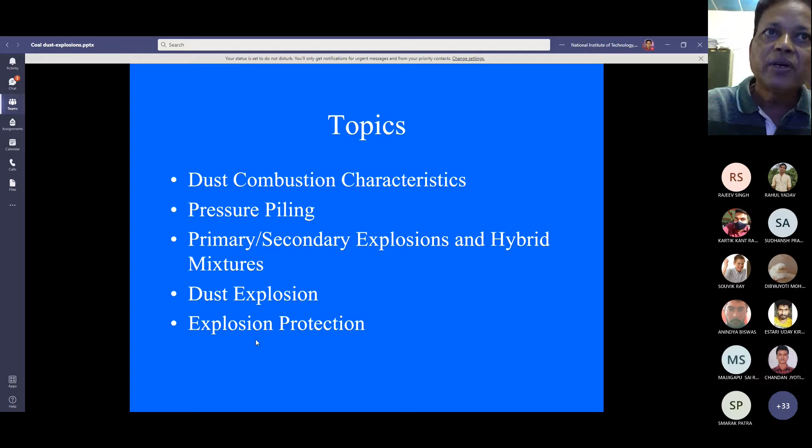Topics covered: dust combustion characteristics, coal dust combustion characteristics, pressure piling, primary and secondary explosions, hybrid mixtures, dust explosion protection plans. Also, the definition of dust, and which dust is dangerous and explosive in nature.

A finely divided powdered solid less than 420 micron size - that is the largest particles that will pass through a standard US 40 sieve. This is the definition of dust: a finely divided powdered solid less than 420 micrometer size.

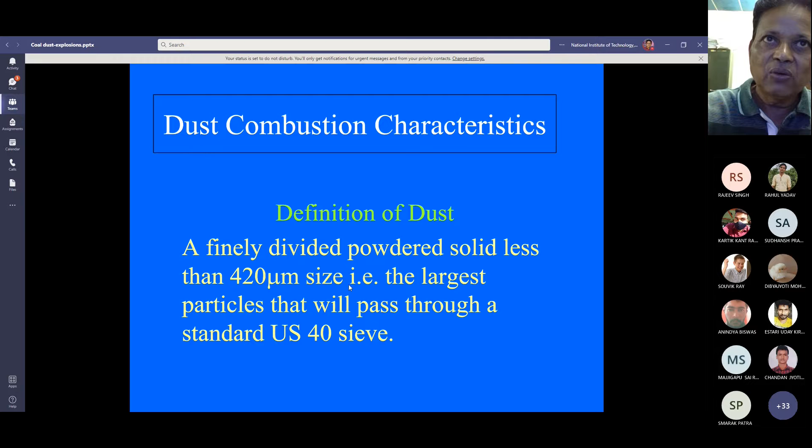Which dusts can burn explosively? Materials which, if finely divided and dispersed in the mine air atmosphere, can burn explosively include coal dust, most organic materials, many metals like iron, aluminum, zirconium, titanium, and some non-metals like sulfur, silicon, and P2S5. These are also combustible materials.

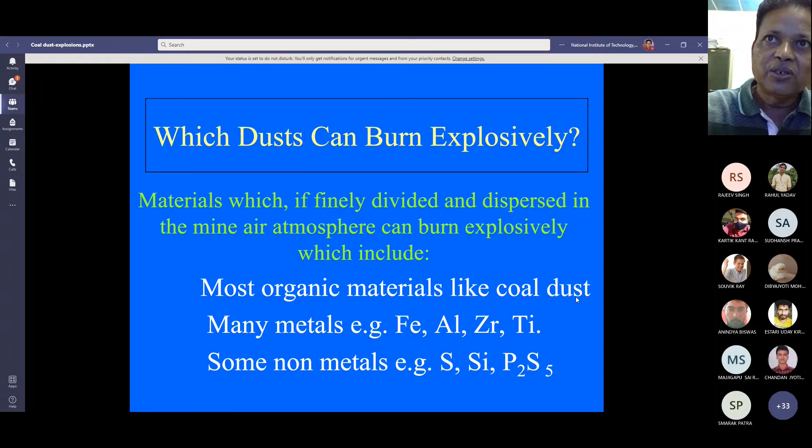So coal dust explosion can take place in your mines because coal dust is explosive in nature. The nature of coal dust explosion is generally they are deflagrations.

Deflagrations are flame fronts that propagate into the unburned cloud at subsonic speeds by a combination of heat and mass transfer. Pmax is approximately 8 times P0. Given favorable conditions...

such as long, large diameter pipework, energetic dusts may detonate. The flame front propagates into the unburned cloud by compression caused by shock waves traveling at or above sonic velocity. Pmax is approximately 20 times P0, but can be higher.

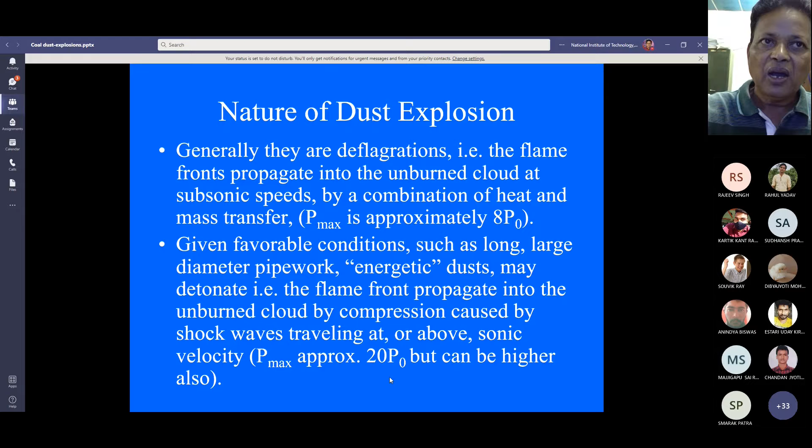What are the conditions required for a dust explosion to take place? These are the conditions necessary: a suspension of dust within its flammable range.

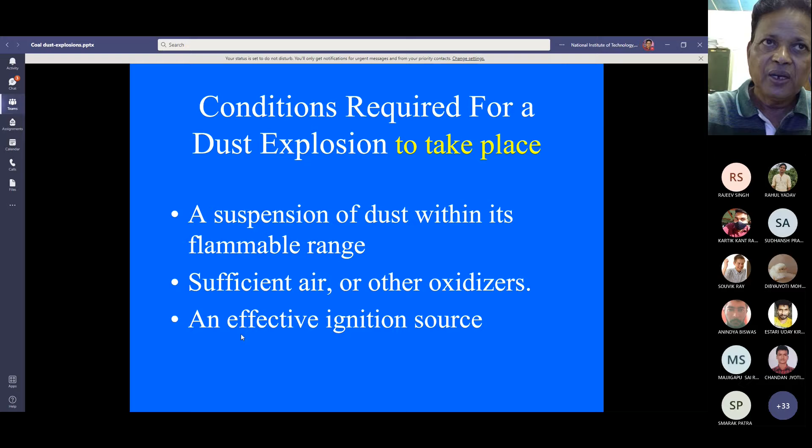Sufficient air or other oxidizers should be there, and an effective ignition source should be there. So for the dust explosion to take place, there should be a suspension of coal dust particles within its flammable range, sufficient air or other oxidizers, and an effective ignition source.

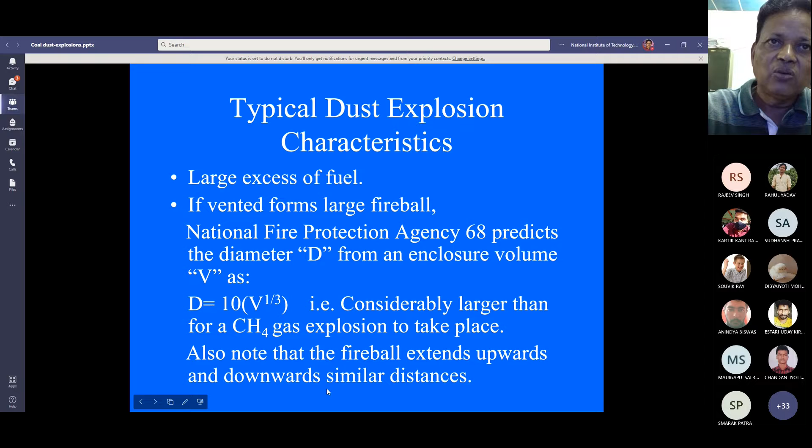large excess of fuel - if vented, forms a large fireball. National Fire Protection Agency 68 predicts the diameter D from an enclosure volume V as D equals 10 times V to the power 1 by 3, considerably larger than for a methane gas explosion. Also note that the fireball extends upwards and downwards similar distances.

This is the fireball, which extends from down to up. This is the fireball.

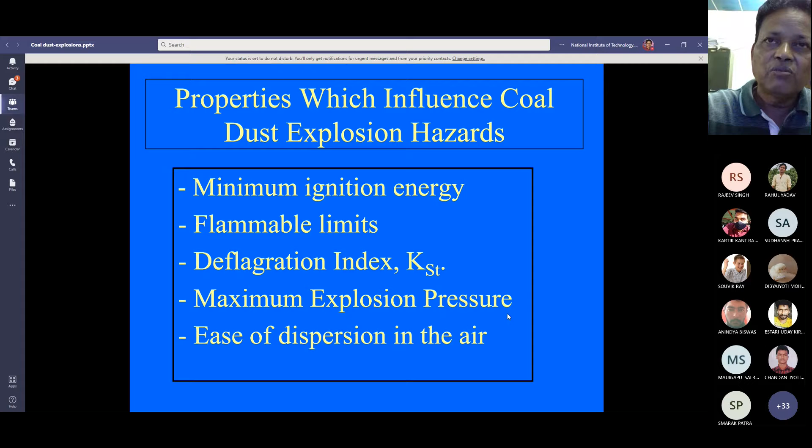Properties which influence coal dust explosion hazards: minimum ignition energy, flammable limits, deflagration index KST, maximum explosion pressure, and ease of dispersion in the air.

What is minimum ignition energy, MIE? The minimum ignition energy of a coal dust cloud depends on various factors, including particle size, chemical composition, temperature, moisture in the coal dust, turbulence, oxygen concentration, and the test method used.

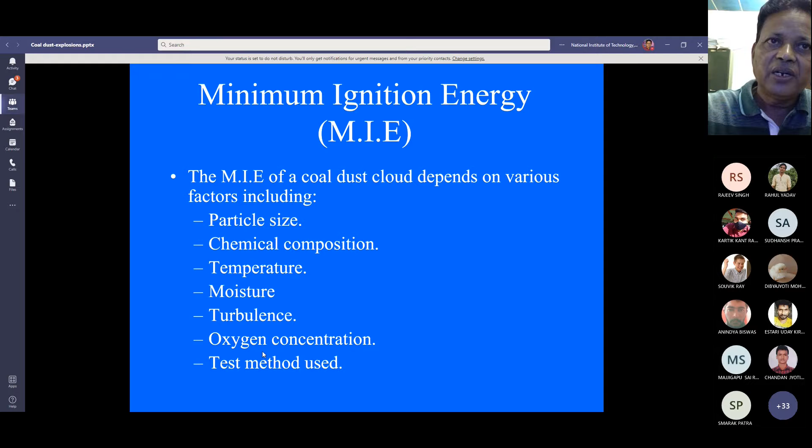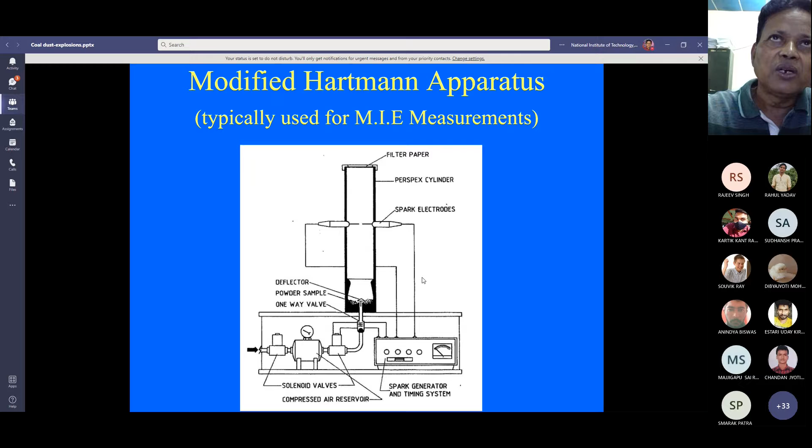The minimum ignition energy depends on particle size. In general, coal dust with particle size above 400 microns will not ignite. If particles are greater than 0.4 millimeter in diameter, dust explosions will not occur.

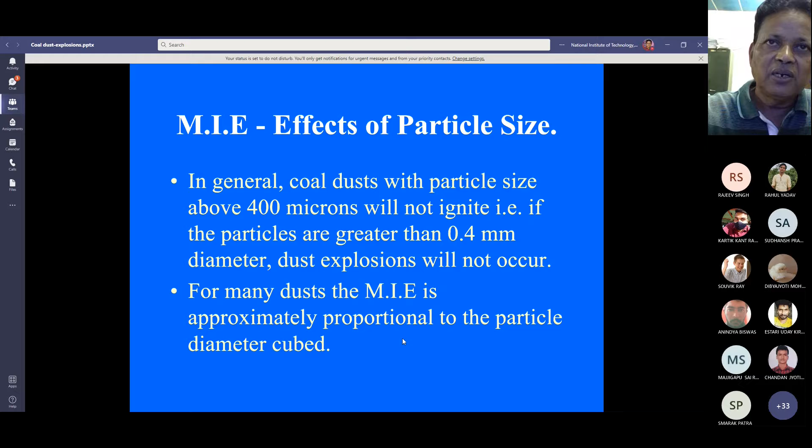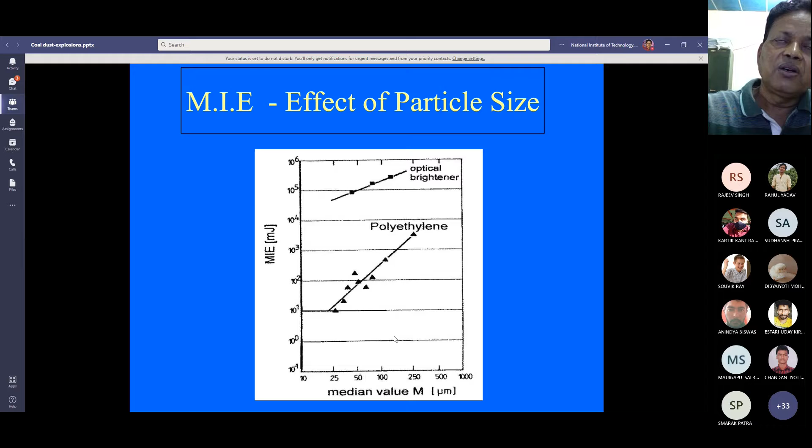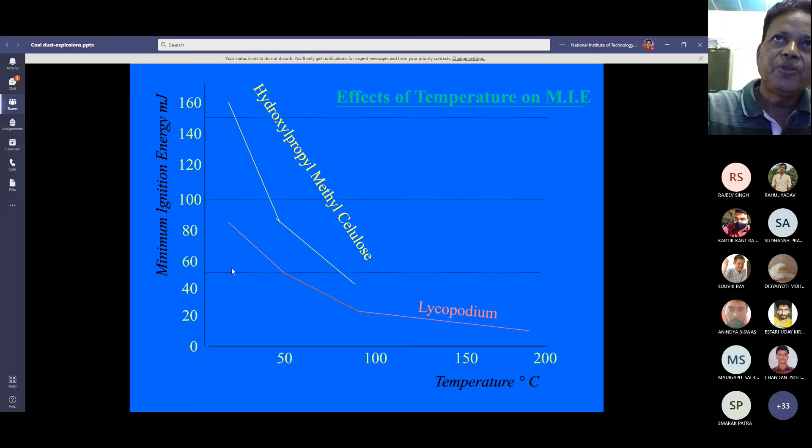Then the effect of temperature on minimum ignition energy. At ambient temperature, lycopodium's minimum ignition energy is 90 millijoules. At 50 degrees centigrade, it is 50 millijoules. At 90 degrees centigrade, it is 20 millijoules. At 180 degrees centigrade, it is 12.5 millijoules. As you can see from this table, as the temperature is increasing, the minimum ignition energy is decreasing. This is the minimum ignition energy plotted against temperature. As the temperature increases from 50, 100, 150, to 200, the minimum ignition energy decreases. This is the effect of temperature on minimum ignition energy.

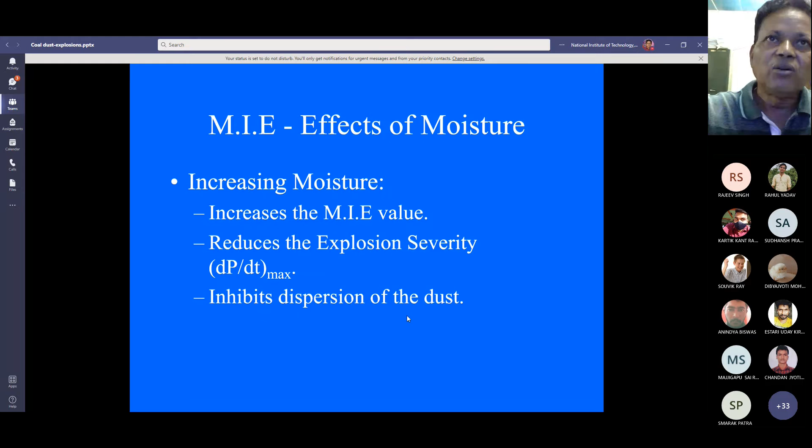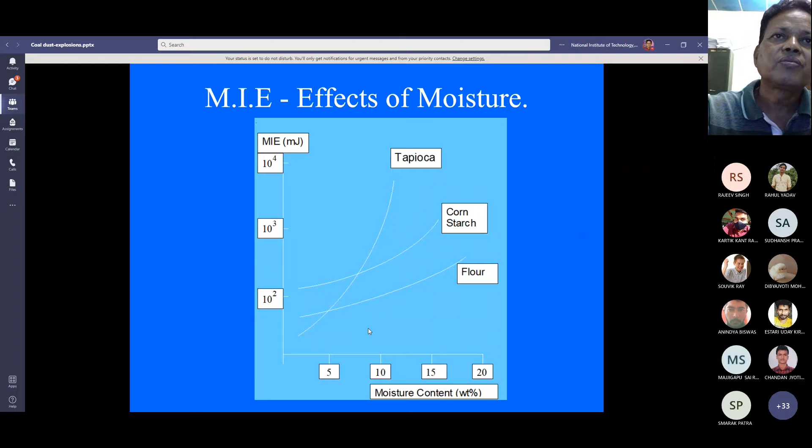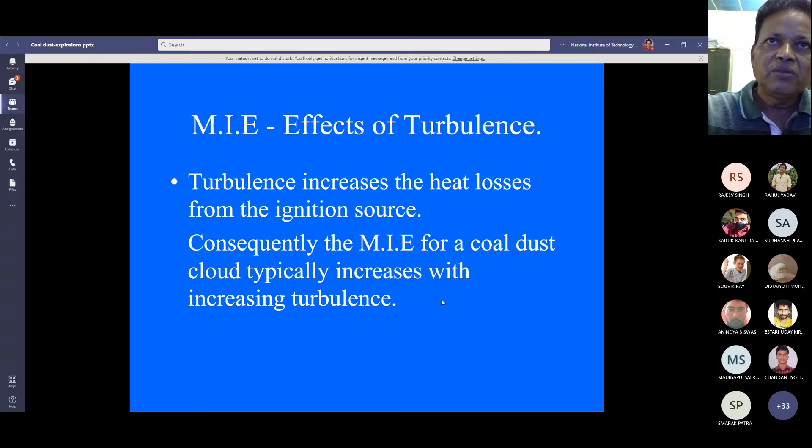Then the effect of turbulence on minimum ignition energy. Turbulence increases the heat losses from the ignition source. Consequently, the minimum ignition energy for a coal dust cloud typically increases with increasing turbulence.

Then the relationship of minimum ignition energy with oxygen concentration. Most coal dusts will not burn if the air pressure is reduced below 50 millibar. Reducing the oxygen concentration in the air increases the energy required for ignition. Most organic materials like coal dust cease to be ignitable in the range of 9 to 14% oxygen. The minimum ignition energy reduces if the oxygen concentration in the mine air is increased above 21%.

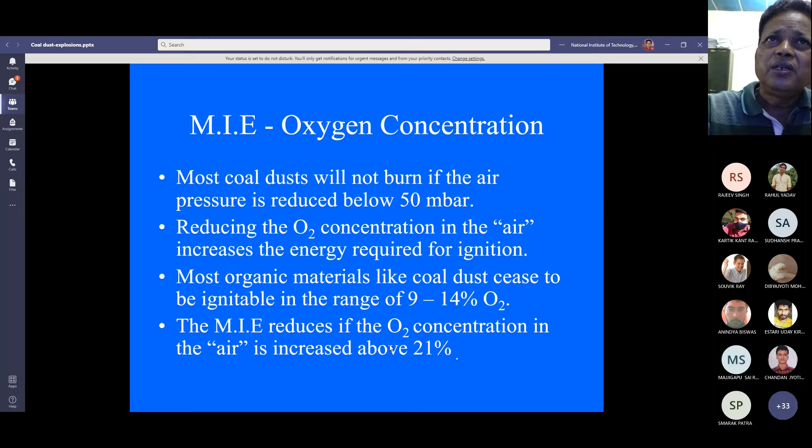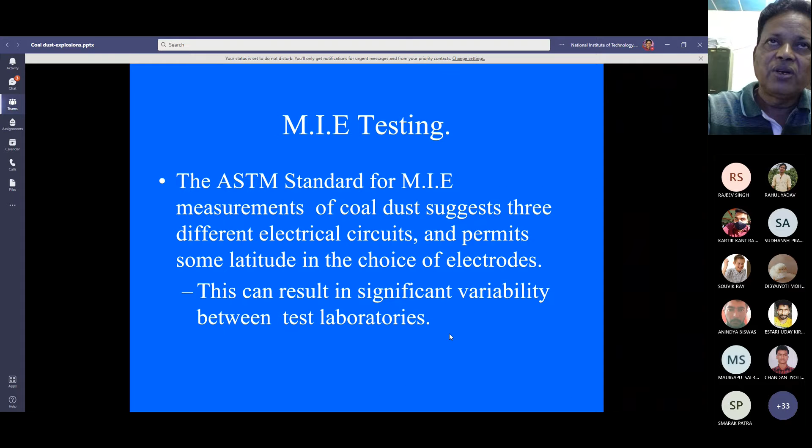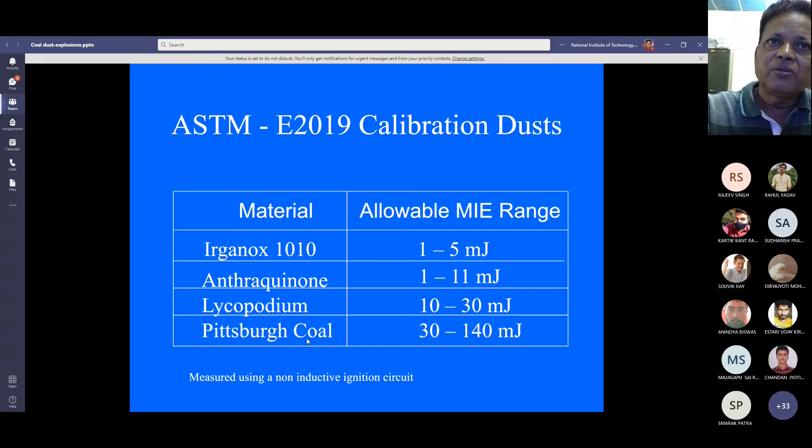The minimum ignition energy testing is done as per the ASTM standard. The ASTM standard for minimum ignition energy measurements of coal dust suggests three different electrical circuits and permits some latitude in the choice of electrodes. This can result in significant variability between test laboratories. ASTM E2019 specifies the calibration dust material and the allowable minimum ignition energy range. For Pittsburgh coal, the allowable minimum ignition energy is 30 to 140 millijoules.

Then we discuss flammable limits - lower flammable limit and upper flammable limit. You have to measure the lower and upper flammable limits of the coal dust. ASTM standard E1515-98 provides the test method for the lower flammable limits of coal dusts using a 20-liter or greater spherical test vessel. Many dusts must be at their stoichiometric concentration or higher for an explosion to occur, and optimum concentrations can be 2 to 3 times the CST.

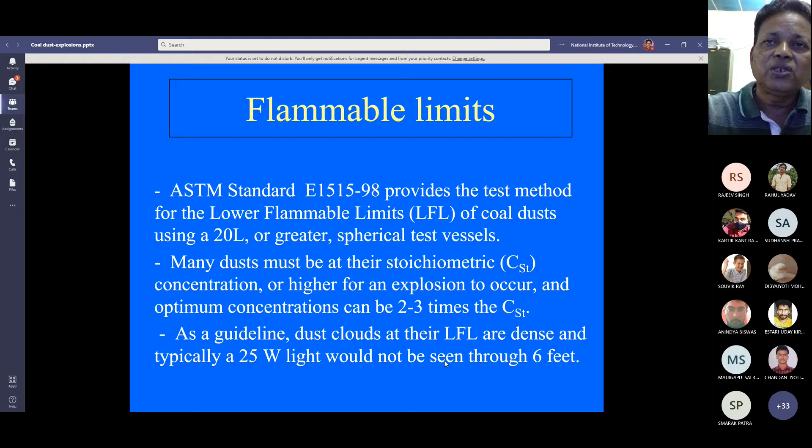As a guideline, dust clouds at their lower flammable limit are dense, and typically a 25 watt light would not be seen beyond 6 feet. Then upper flammable limits: dust clouds have upper flammable limits which are dependent on both the composition and the particle size of the dust. For example, a narrow size fraction of corn starch with a particle distribution of 106 to 125 microns is reported to have an upper flammable limit of 800 to 1000 grams per cubic meter. As a dust cloud settles, it will enter the explosive range. Also, dust layers can smolder.

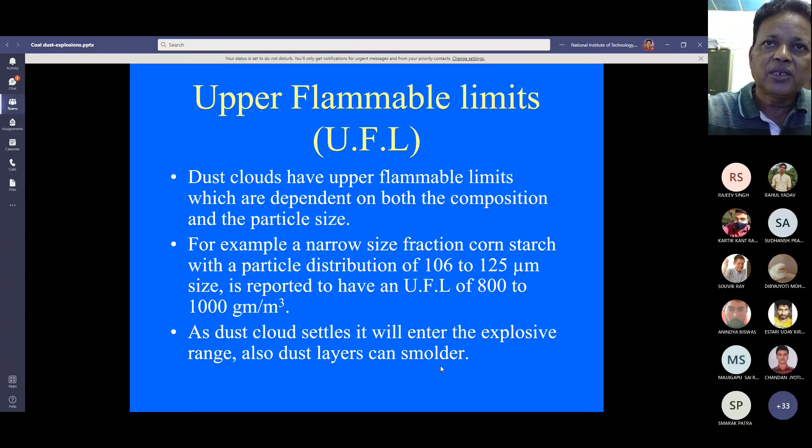Then there is another index called the deflagration index, KST.

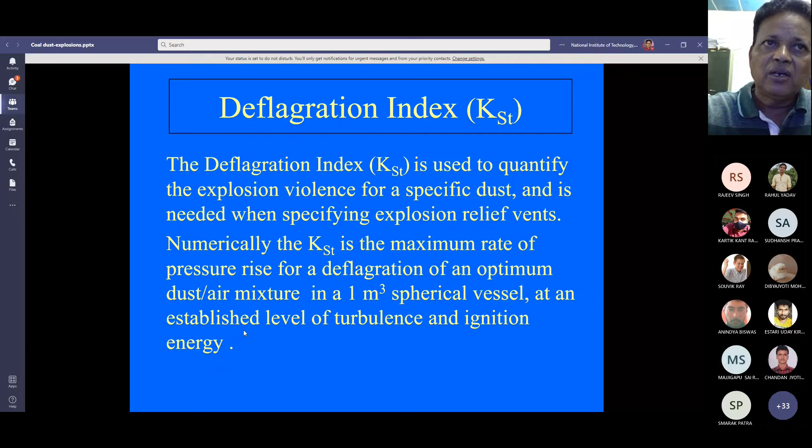The deflagration index, KST, is used to quantify the explosion violence for a specific dust and is needed when specifying explosion relief vents. Numerically, KST is the maximum rate of pressure rise for a deflagration of an optimum dust/air mixture in a 1 cubic meter spherical vessel at an established level of turbulence and ignition energy.

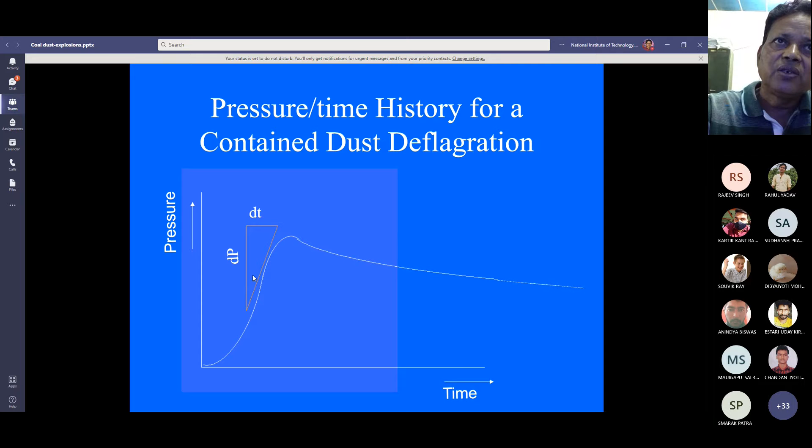Pressure versus time history for a contained dust deflagration. This side is the y-axis pressure, x-axis time. So this is the graph you are getting.

So deflagration index KST for a specific dust - the maximum rate of pressure rise in vessels of different volumes can be predicted by the cubic law. dP/dt times V to the power 1/3 is a constant which is called KST, the deflagration index. So the deflagration index equals dP/dt times V to the power 1/3.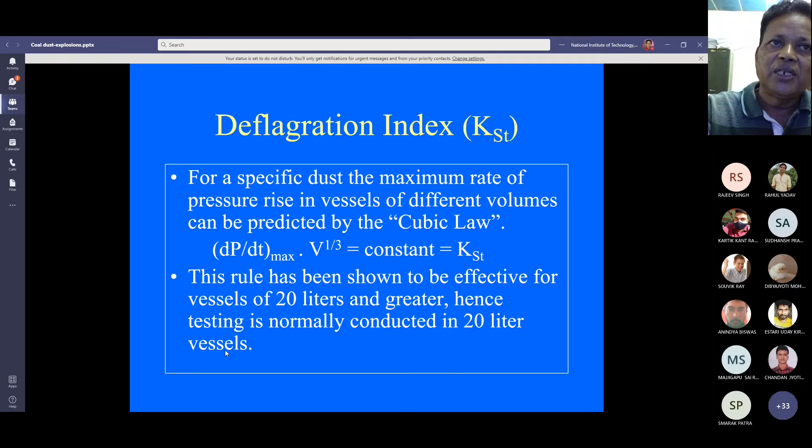This rule has been shown to be effective for vessels of 20 liters and greater. Hence, testing is normally conducted in 20-liter vessels. This is the 20-liter test vessel where this experiment is conducted.

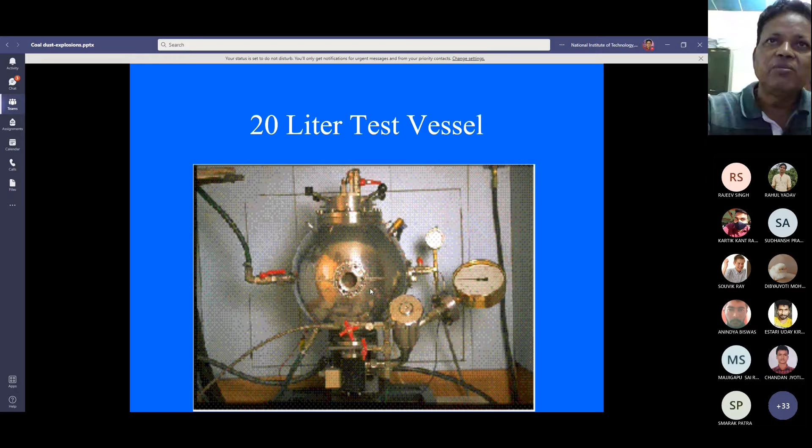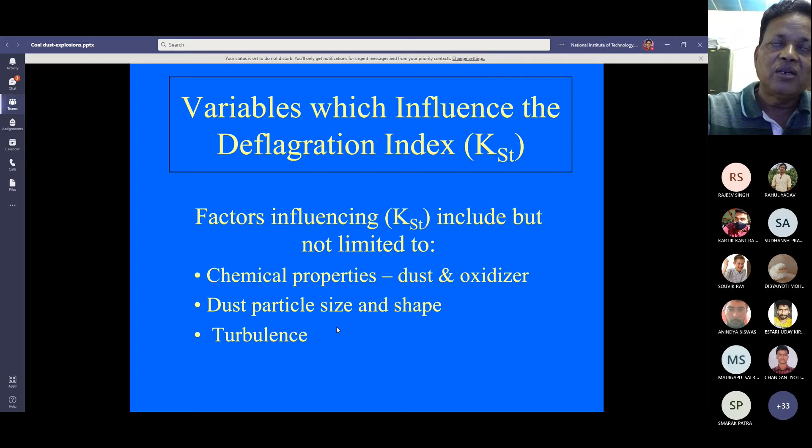Variables which influence the deflagration index. Factors which influence the deflagration index include, but are not limited to, chemical properties of dust and oxidizer, dust particle size and shape, and turbulence.

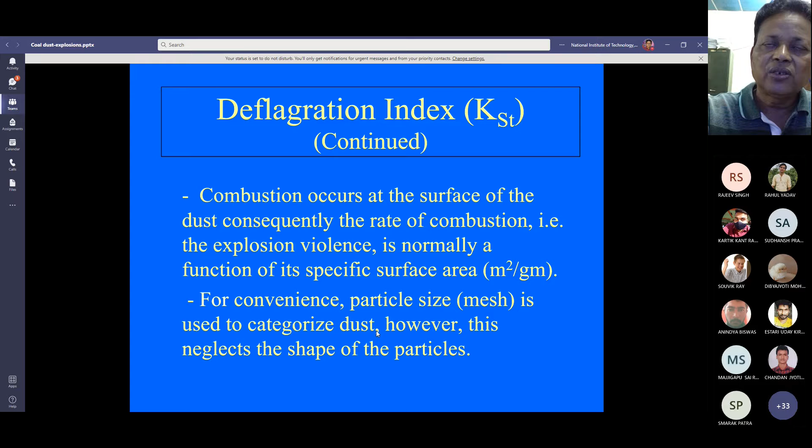The deflagration index also depends on where combustion occurs at the surface of the dust. Consequently, the rate of combustion, that is the explosion violence, is normally a function of its specific surface area, in meter square per gram. For convenience, particle size mesh is used to categorize the dust. However, this neglects the shape of the particles.

Deflagration index: dust combustion rate is determined by devolatilization rate, gas phase mixing rate, and gas combustion rate. As long as (a) is limiting, reducing particle size will increase the combustion rate.

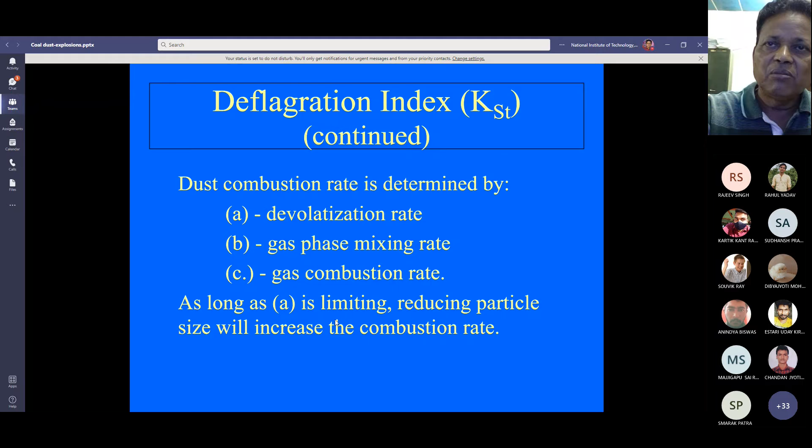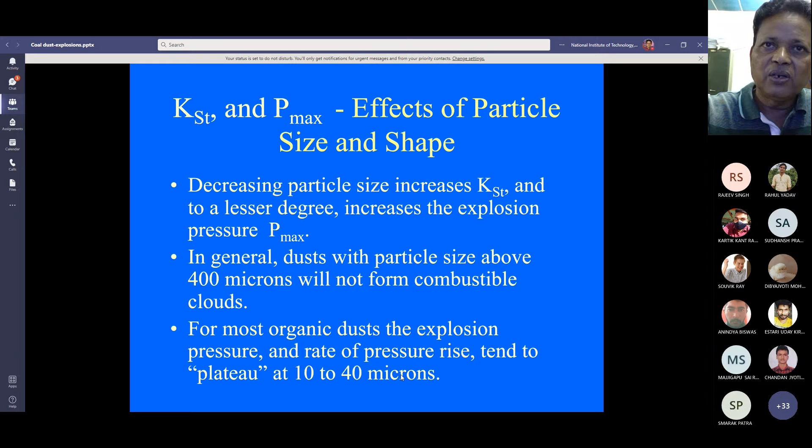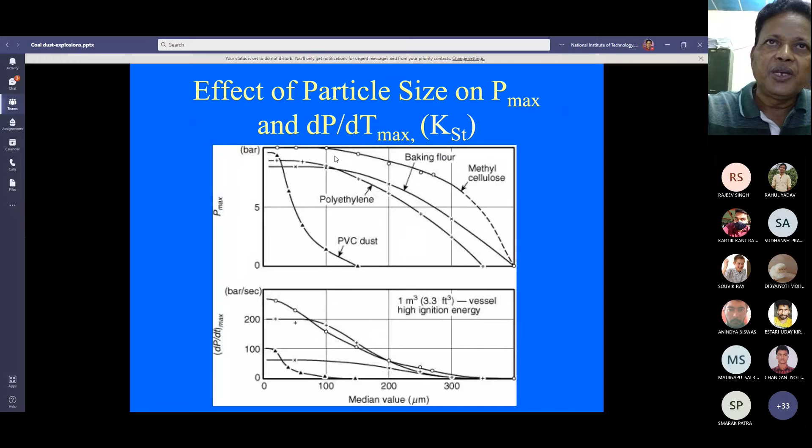KST and Pmax effects of particle size and shape: decreasing particle size increases KST, and to a lesser degree increases the explosion pressure Pmax. In general, dusts with particle size above 400 microns will not form combustible clouds. For most organic dusts, the explosion pressure and the rate of pressure rise tend to plateau at 10 to 40 micron size. The effect of particle size on Pmax and dP/dt is depicted in this graph.

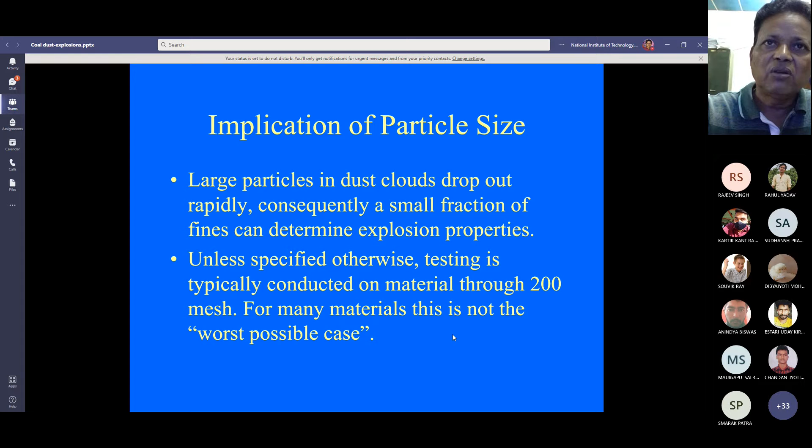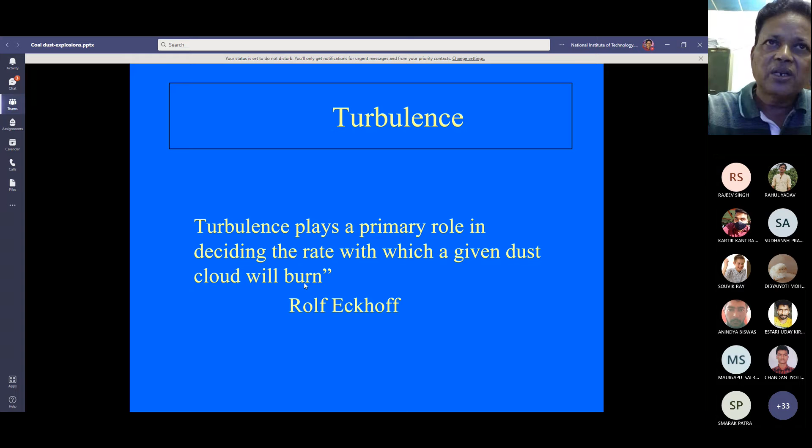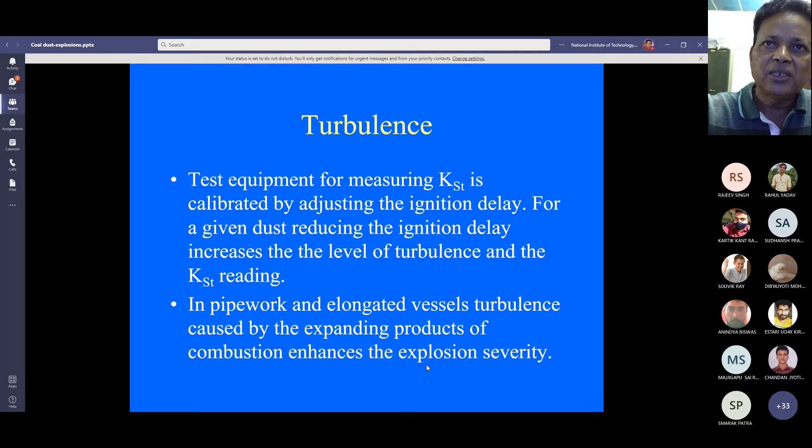Turbulence plays a primary role in deciding the rate with which a given dust cloud will burn. What is turbulence? Test equipment for measuring KST is calibrated by adjusting the ignition delay. For a given dust, reducing the ignition delay increases the level of turbulence and the KST reading. In pipework and elongated vessels, turbulence caused by the expanding products of combustion enhances the explosion severity.

There are two types of explosions: primary explosion and secondary explosion. In order for a dust explosion to occur, it is necessary for the dust to be in suspension and within its flammable range - the dust particles must be suspended particles, within its flammable range.

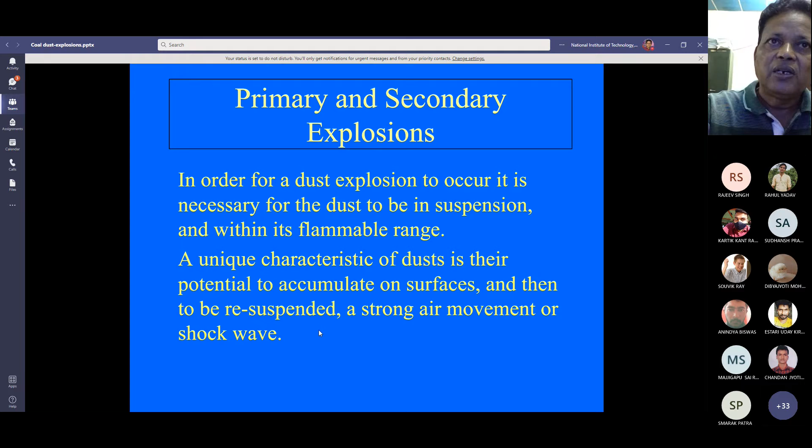A unique characteristic of dusts is their potential to accumulate on surfaces and then to be resuspended. A strong air movement or shock wave is necessary to keep the dust particles suspended.

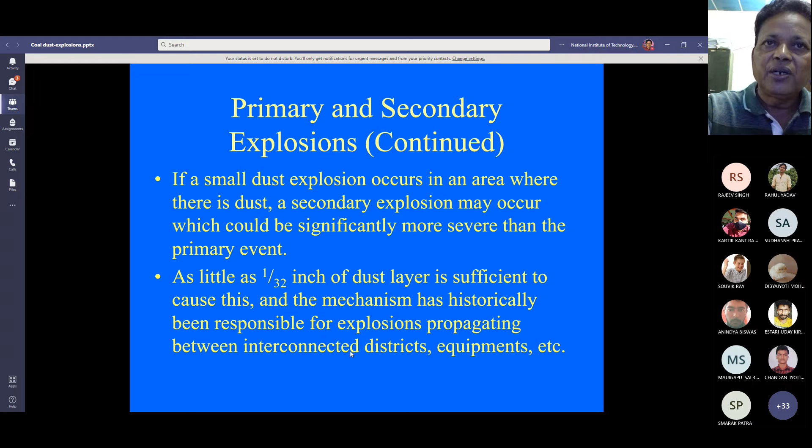Primary and secondary explosions: if a small dust explosion occurs in an area where there is dust, a secondary explosion may occur, which could be significantly more severe than the primary event. As little as 1/32 inch of dust layer is sufficient to cause this, and the mechanism has historically been responsible for explosions propagating between interconnected ducts, equipment, etc.

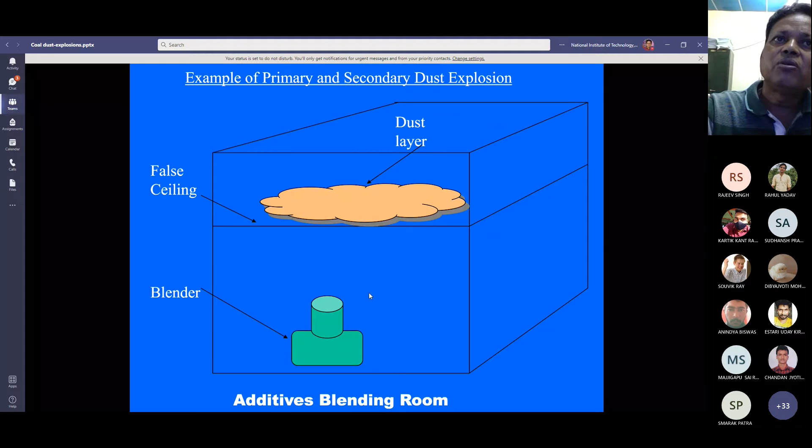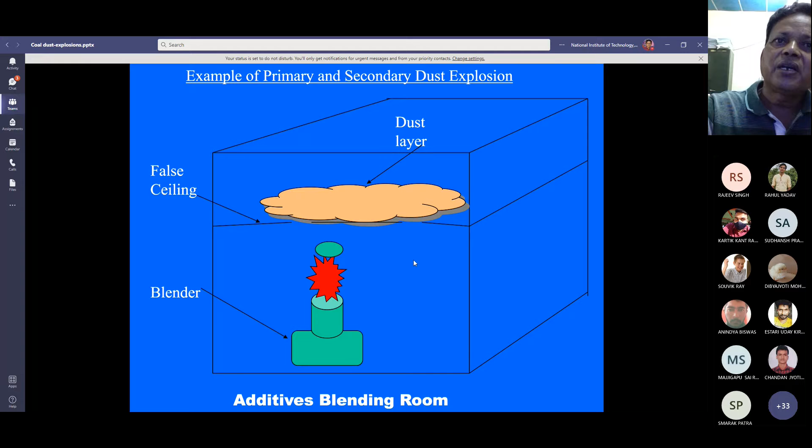So here you see an example of primary and secondary dust explosion - an additives blending room with a dust layer. After the primary dust explosion, it spreads to the false ceiling and to the dust, and secondary explosion is going to take place.

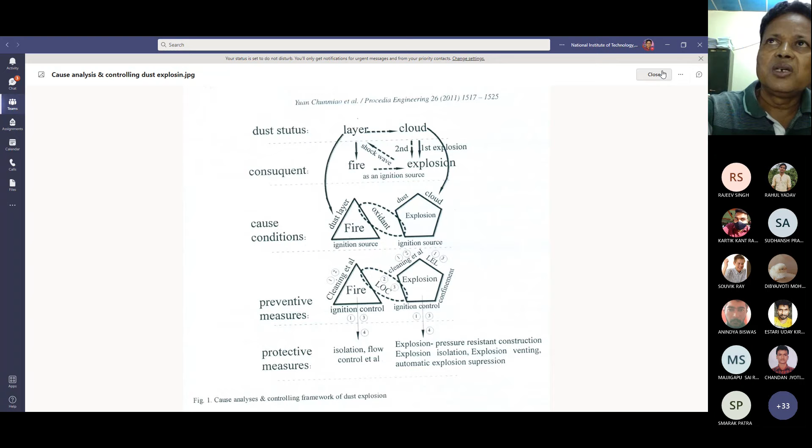So this dust explosion is a major menace in coal mining operations. We have seen these coal dust explosions in greater detail, and we have understood that the particle size is very important for the coal dust explosion to take place.

We have discussed coal mine explosion, underground coal mine hazards, safety, fire, spontaneous combustion, and many other things with respect to your mine hazard class. We have also seen dust explosion prevention in the last class.

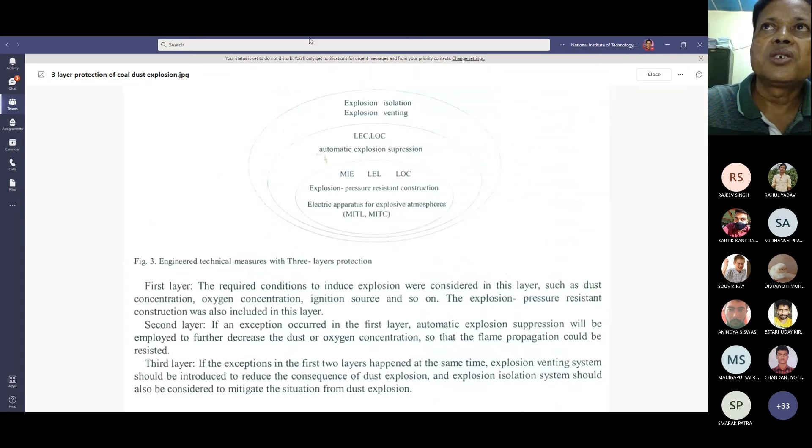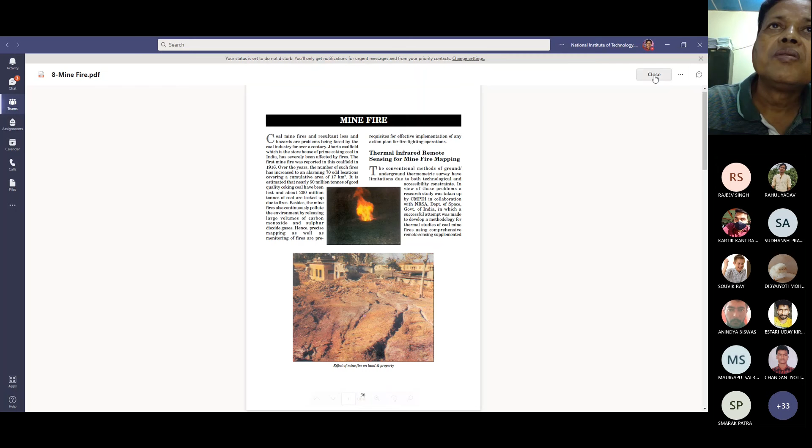Explosion prevention also we have discussed, and mine fire also we have discussed. And this carbon monoxide oxygen ratio problems also we have seen.